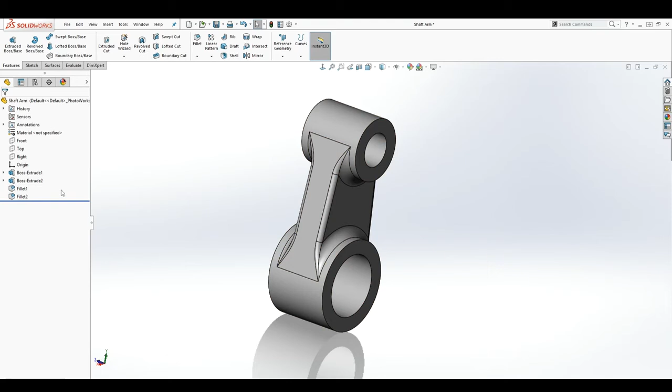And another type of feature that is in SolidWorks is the applied feature. Applied feature can be either a fillet or a chamfer. So this part has an applied feature, which is a fillet. This fillet can be applied directly to the part, and you don't need a sketch to be able to make it. As you can see, there isn't a drop down arrow attached to this fillet to be able to make it.

And I'm just showing you this now just to define what SolidWorks is, because I believe learning visually is very important and is one of the best ways to communicate what you are trying to say. But don't worry, we are going to go into great detail as to what each and every one of these features is, and by the time you are done with this lecture, you will be able to design any part from A to Z. So don't worry about it. We're just going through the overview of what SolidWorks is.

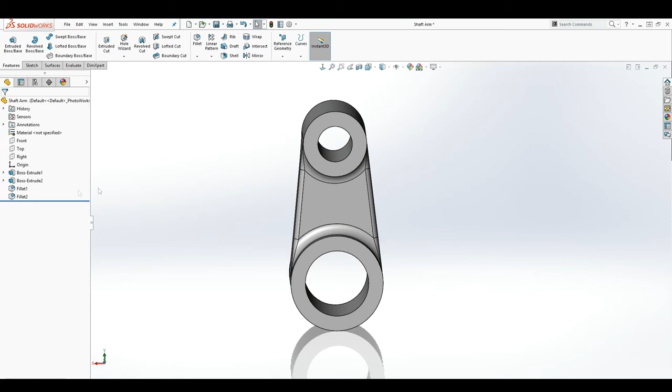Another way to think about SolidWorks is a parametric modeling software. So what does that mean? Let me just show you. It means that when I click on this part, for example, and I edit the sketch, there are two instances that make SolidWorks parametric. The first one is the dimension, and the second one is the relation. So these two features are actually used to define the sketch.

So it just makes it easy for us. Let's say you've modeled your part. I've made this part now, and let's say I decide that this dimension is different now, and I just want to change it. So what parametric means is the dimensions and the relations allow us to go back into the sketch we've already made and easily change it, and it will be automatically applied to our part.

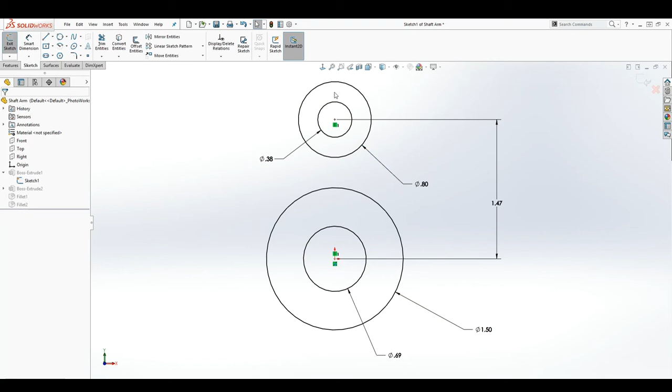So I'll just show you. So let's say this part now, I want to change that to 0.8, and this, I want to change this to 1.5. And as you can see, that has changed, and when I just exit out of it, as you can see, that part has updated. So that's what parametric means. It makes it easy for you to change your sketch, and everything will update in the part.

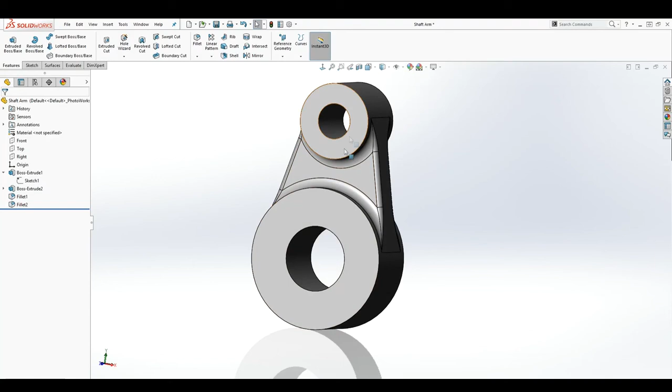Another way to think about SolidWorks is a solid modeling software, which means this part is one solid piece. All the wireframes and all the face geometry that are required to make this part are actually on it. And another way to think of it is when I click normal to and I section it, as you can see, it is one solid piece. It is not hollow.

So that is pretty much the best way to define SolidWorks. Three things to keep in mind. It is a mechanical design software. It is a feature-based software, which means you need all the features to design one part. It is a parametric modeling software, which means it's easy for you to edit each part in the future, and it is a solid modeling software.